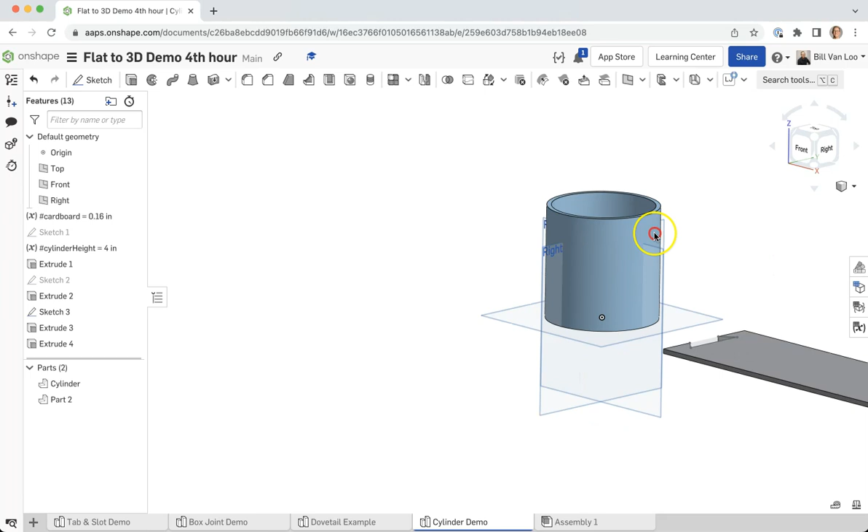All right, so in this video, what I'd like to show you is how we can use our flat modeling techniques in Onshape to actually make a circular shape like this cylinder right here. So this is going to involve a couple of steps. I'm going to zoom back and show you what I'm going to end up with, basically, and then I'm going to talk you through how I got there.

So ultimately what I want is this cylinder, but I want to make it out of a single flat piece of cardboard. So the question is, how do I do that? I could chop this up into a bunch of tiny little rings that all get stacked on top of each other. But instead what I'm going to do is basically take this one cylinder, unroll it to make one flat piece. I'm going to add some joinery so the ends of that piece can get stuck together.

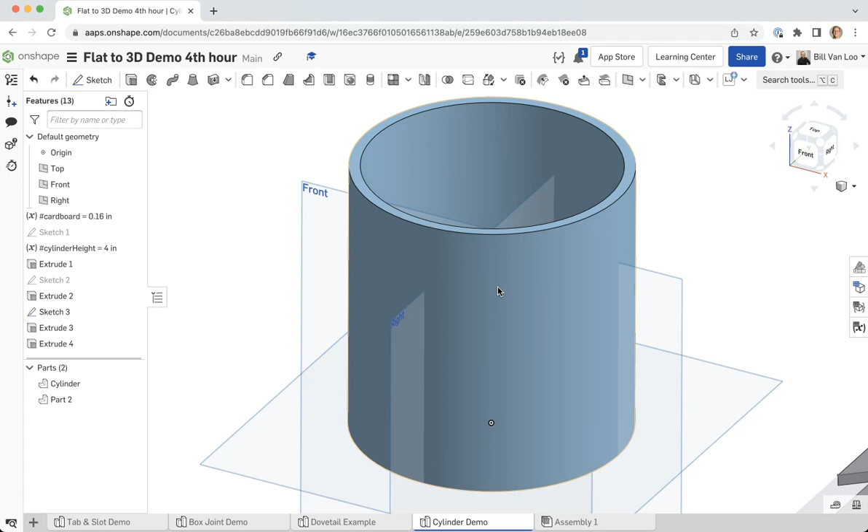And then when we eventually laser cut this, we will have to add a few things to the drawing that is used by the laser cutter so it knows to score the piece so that it becomes flexible and we can wrap this thing around. So let me make a new part studio, and right away what I need to do is start off by sketching my cylinder. And so the way that I do this is going to be important.

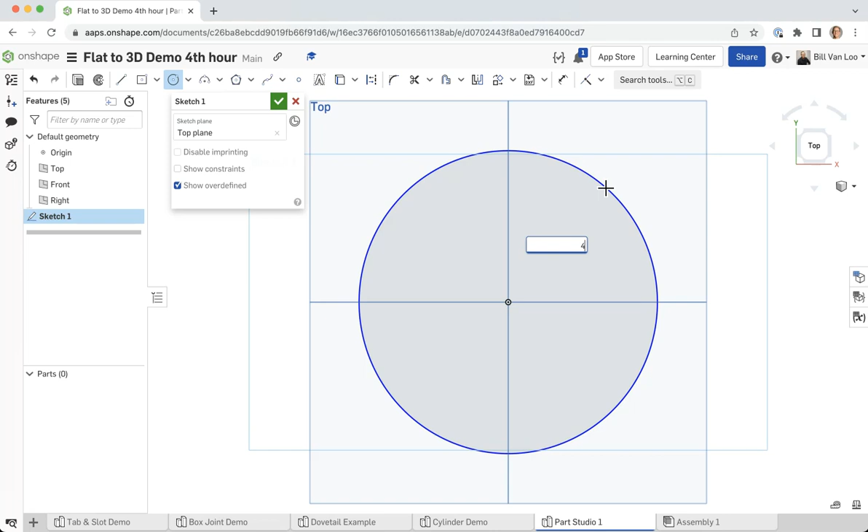I'm going to sketch on my top plane, and I'm going to create a circle. So let's say that I want the cylinder's outside diameter to be 4 inches. Next thing I need to do is make another circle inside that that basically acts as the inner wall of the cylinder. So I'm going to bring this out to whatever arbitrary size. And now what I want to do is add a dimension between those two things. I want to be able to say specifically how far apart these two circles are, because that's going to be the thickness of my piece of cardboard.

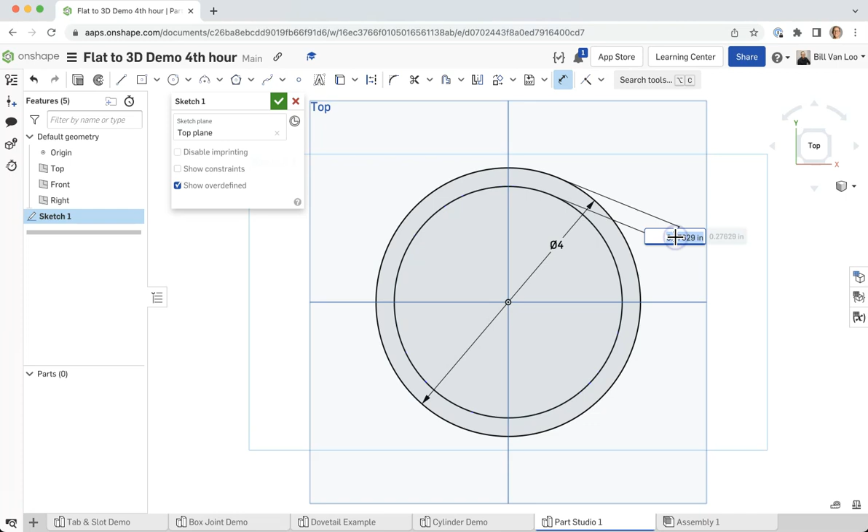So I'm going to make myself a variable. I'm just going to call this cardboard. I'm going to say that it's 0.16 inches. And now we're going to see those two circles adjust. So that all looks good. Next, what I want to do is actually extrude this up to create the cylinder. So I'm going to go ahead and select just that outer ring.

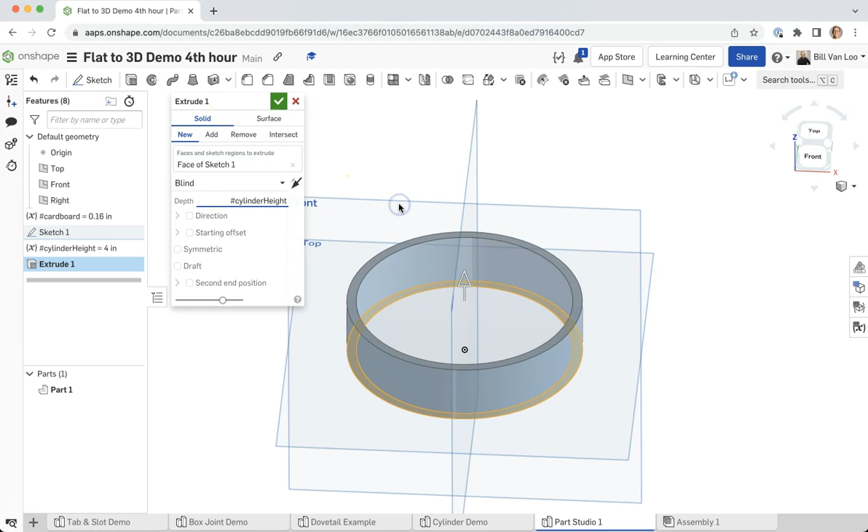And I'm actually going to make myself another variable just so that I don't have to keep track of stuff quite so much. We'll say that this is my cylinder height, and let's say that we want it to be 4 inches tall. So we'll go ahead and click the check. And now I've got a 4-inch tall cylinder. So that all looks great. So I can use that in my model as the cylinder.

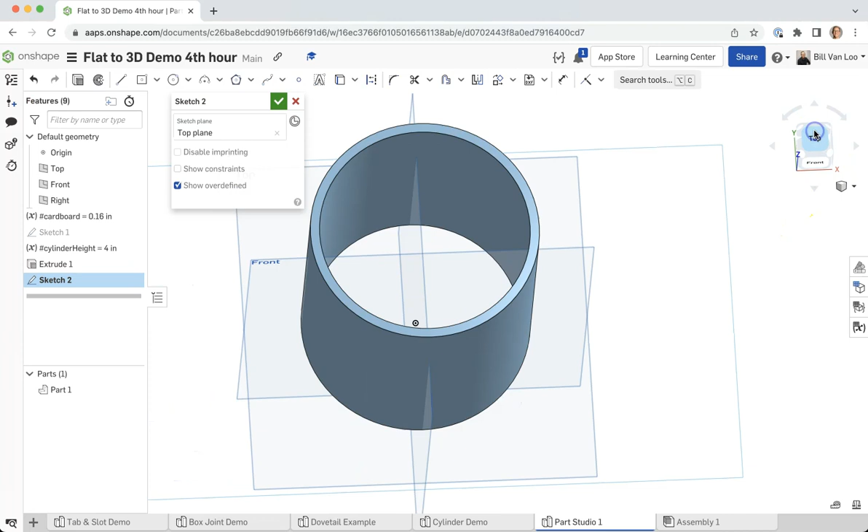But now what I want to do is think about how I'm going to make this on the actual laser cutter out of that single flat piece of cardboard. So I'm going to make myself another sketch. I'll do this just on the top plane as well. And what I want to do is think about unrolling this cylinder into the flat piece. So I know that ultimately it's going to become a rectangle with some features, and I'll add those in a second. Instead of using my center point rectangle, let me use my regular rectangle here. And I'm just going to draw this out, again, at an arbitrary size.

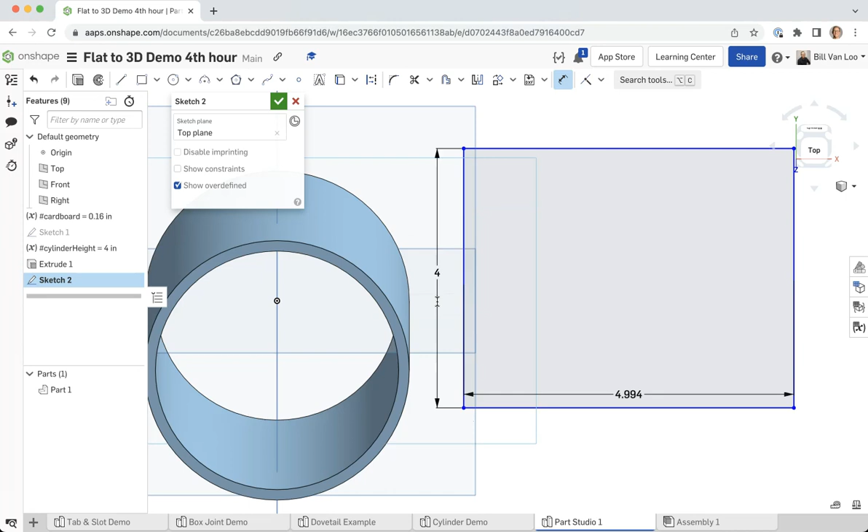So in other words, I'm not trying to get that rectangle exactly perfect right now, but now I do need to put in some dimensions to make it exactly the right size. So the first thing I'm going to do is come over here and say this is going to be the height of my cylinder. So I'll use that variable cylinder height that I made, and it's going to adjust it to 4 inches. So it's 4 inches tall, just like my cylinder, or it will be. But now I want to think about what the length of that is. And so here we have to go back a little bit to our geometry.

So what we defined when we said that this outside circle was 4 inches was the diameter. But what we need to know now is what's the circumference of that circle. And the circumference is just 2 pi r. So what I can actually do in Onshape is say, well, I want this length of this thing once it's unrolled to be 2 times 3.14. We're just going to use that for pi. You can put more significant digits in if you want, 3.14159. I don't remember what the next digit is, something like that.

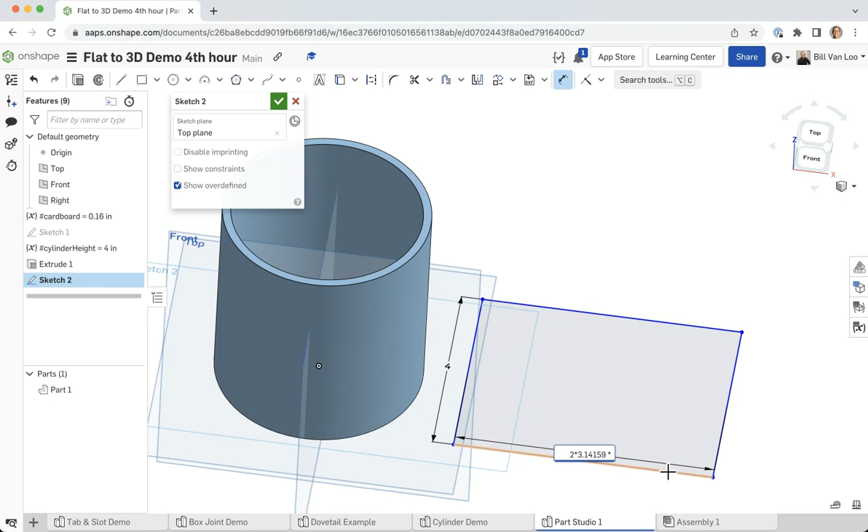And then, so that gives us 2, that gives us pi. What was the radius of our circle? Diameter was 4, what's the radius? Radius is 2. Okay, so Onshape will take that whole thing, and it will spit out the correct calculation for us. So that is the circumference of that circle, unwrapped as though it were a flat shape. That all looks good.

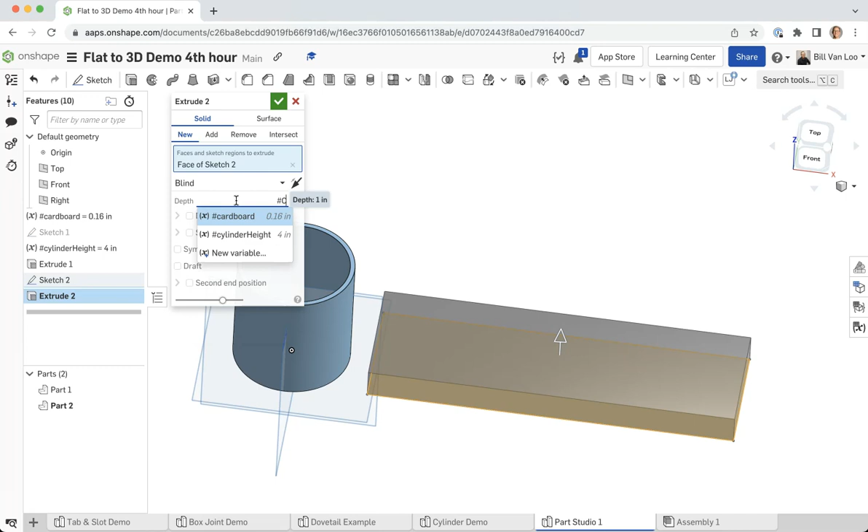And now I could go through and I can extrude this out the depth of my piece of cardboard there as well. So if all I wanted to do was just cut that flat piece and then fold it up, I could probably do this at this point. Again, I would have to take it into the software that we'll use to set up the drawing file to make those score lines so that it becomes flexible.

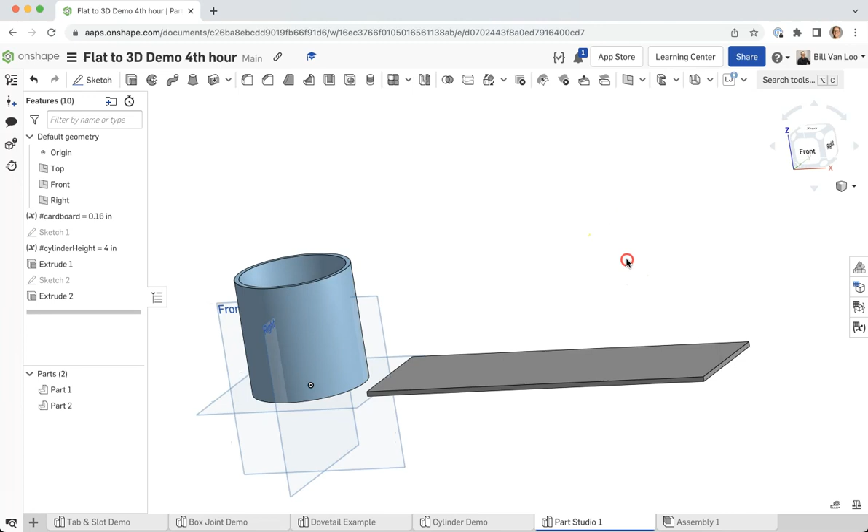But I'd like that thing to be able to be joined together so that it's not just kind of flopping around once we wrap the cylinder around there. So I'm going to add a little bit of joinery to the end of this. And this is maybe useful to show some sketching techniques here as well. So I think what I'd like to do is add one of those dovetail or sort of puzzle joints to the end of this thing.

And here's how I'm going to approach this. I want to make one of those angled lines go off this way, and the flat part of it go out this way. Now I didn't place that very precisely, but that's okay, because here's what I'm going to do. I'm going to make myself a construction line right at the midpoint, and I'm simply going to mirror this angled line over. Oh, whoops, I need to select my mirror line first. I'm going to click on my mirror line, select this, and then it's going to mirror that angled line over there.

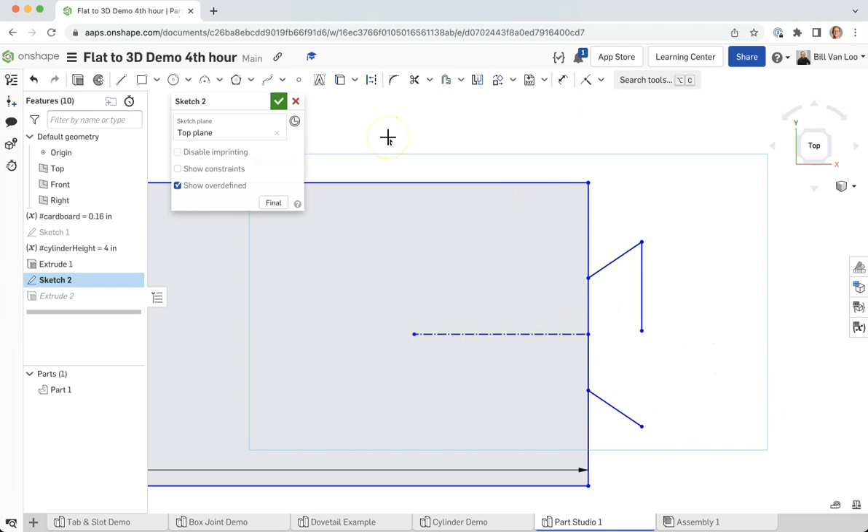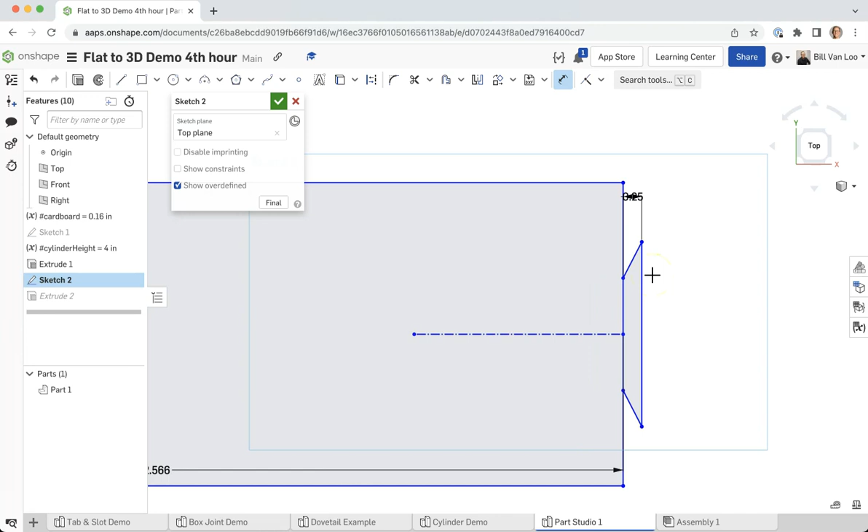So that looks great. I'm going to get rid of this line because it was just a placeholder. And now I'm going to actually complete that shape, so now it turns into a closed face. I also am going to use my dimension tool to set the distance between these points here. I think maybe 0.25 would be good for this. I don't want it to be too big because this is supposed to be circular, and a big flat dovetail is going to make it hard to curve that whole thing around.

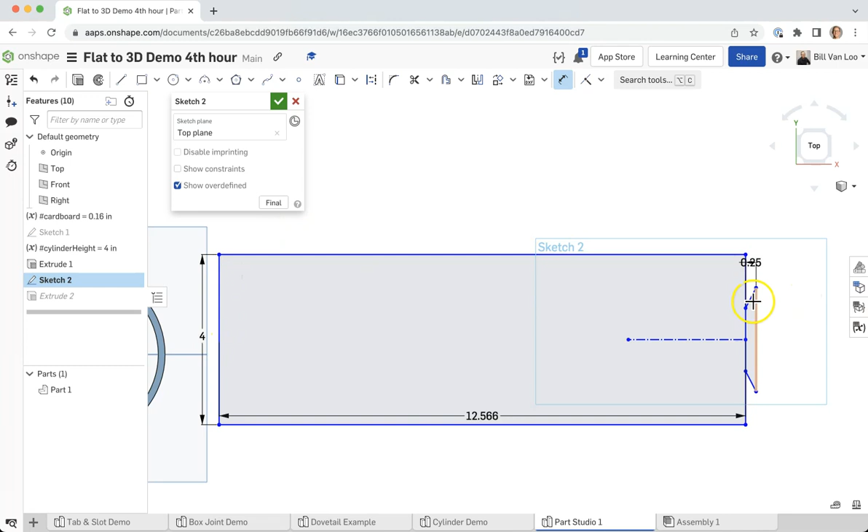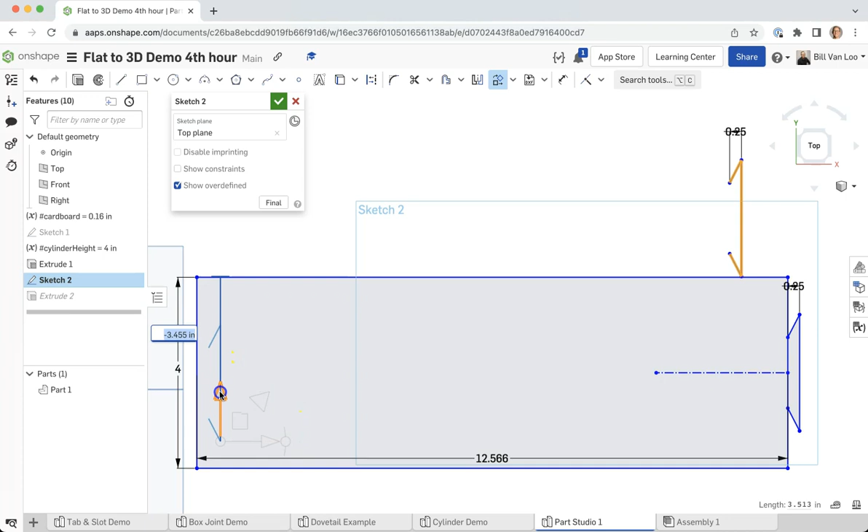So that looks great for the positive end of this, but I'm going to be wrapping around itself, and it's got to lock into the other end. So how do I get that sketch geometry over there? Well, I can select those couple lines, 1, 2, 3. I can copy those. If I right-click, I can say Copy Sketch Entities. And now I can paste those things in there. They're definitely not in the right spot, but I can use my tools to line those things up. I'm going to drag this down some. Basically I'm looking to get this in exactly the same spot on this side compared to where it is on the other side.

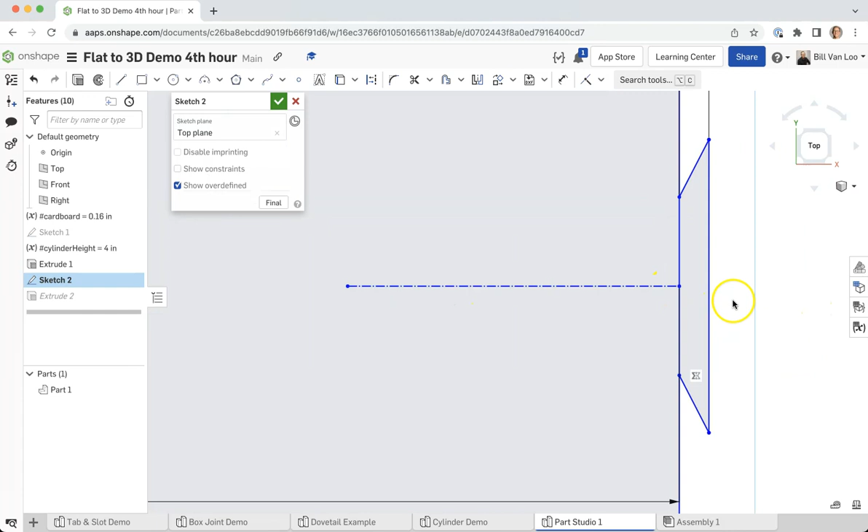So let's see. Might have helped me out if I'd grabbed the other line there as well. I'm kind of eyeballing this right now. Actually, let me redo this because that didn't work very well. I'm going to undo pasting that. Looks like Onshape has taken a second to undo that change. Okay, there we go. So what I'm going to do is make one more line that goes between those things, and then I'm going to copy all 4 of those lines instead of just those 3.

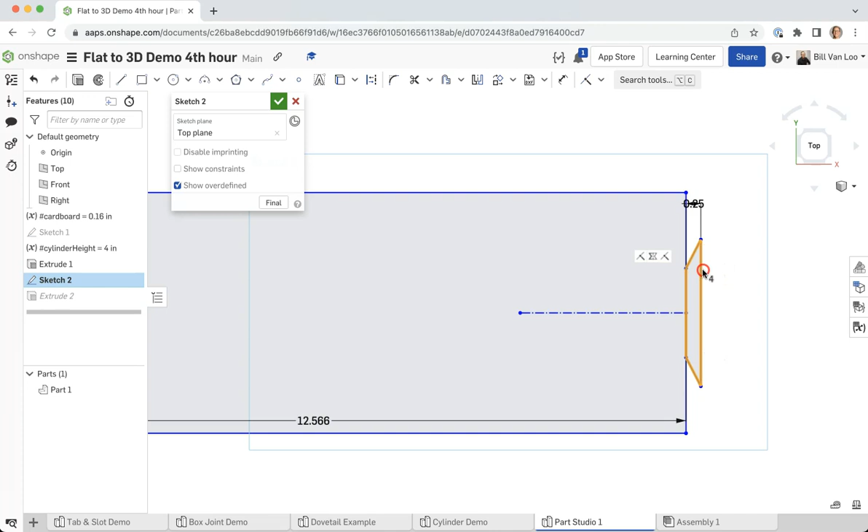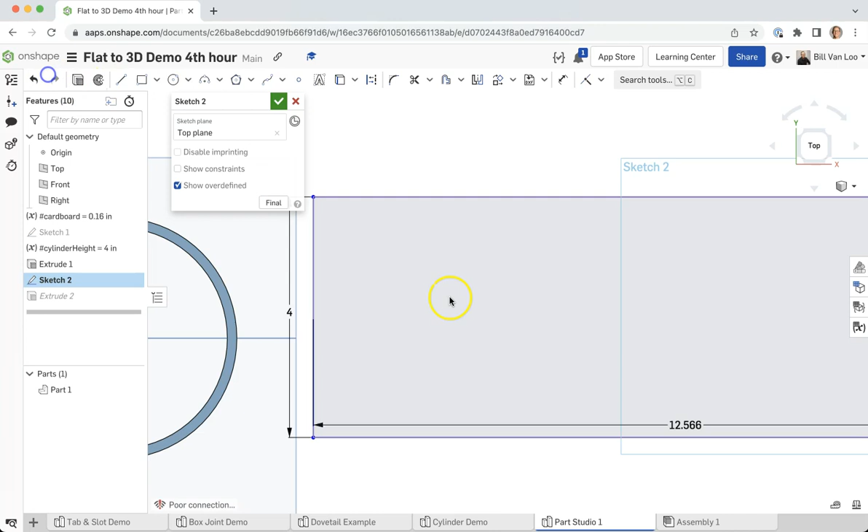So let's copy sketch entities, paste sketch entities, and now when I move this over, what you should see is that line at the end, hopefully, is going to start lighting up and connecting over there. And if it doesn't, that's okay. We can just leave those lines right there. Whoops, come on. Try that one last time. I had to click to set the line. That's what it was. All right, so let's just use a constraint to put those in place.

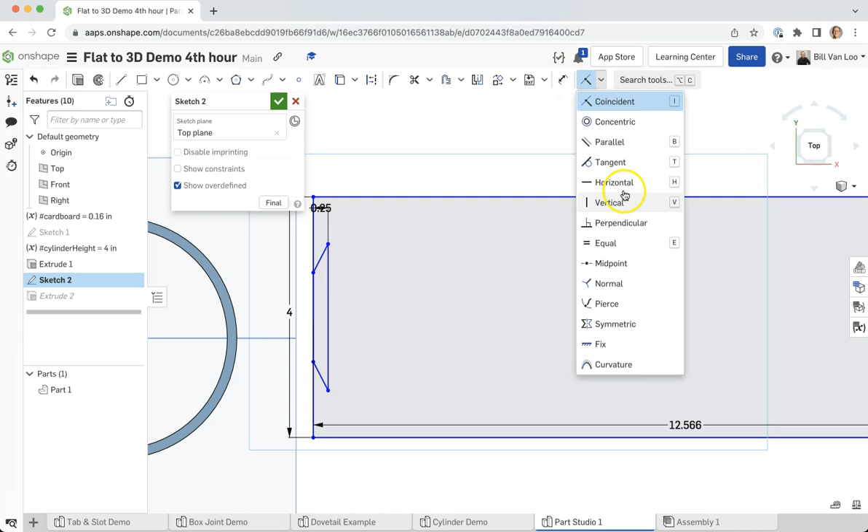So we know that we want this line to be coincident with this line. So that snaps those things together. That's great. And we want the midpoint of that short line and the midpoint of this line here to be the same. And it looks like maybe those already are, so I think we're good there. And now it's already cut that away.

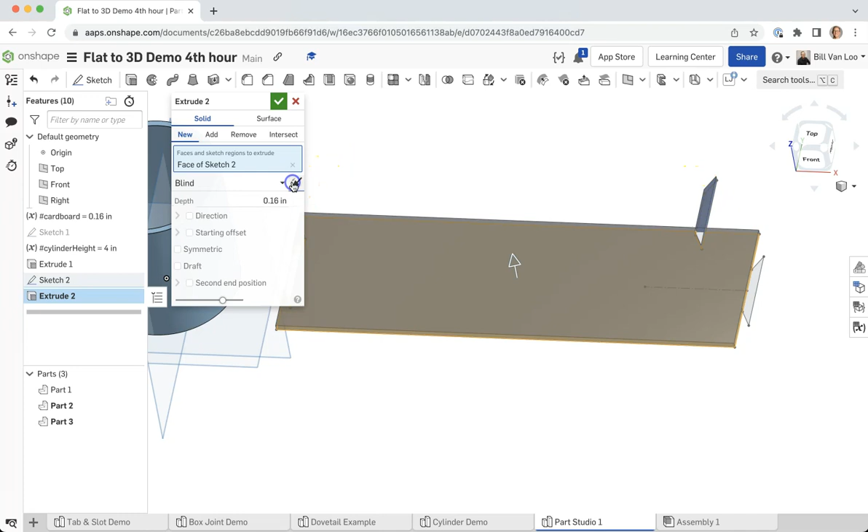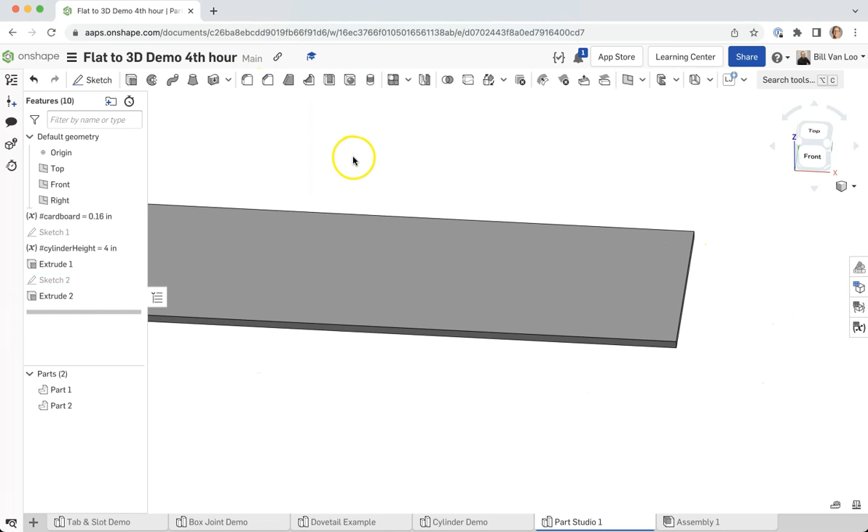Whoops. Sorry, we've got to get rid of that piece up there. I don't know why that was doing that. Okay. So it accidentally took a bite out of that. Let's get rid of that in my sketch. All right, there we go. So it correctly left that dovetail slot there, but it did not extrude this part here for the positive piece. So there we go. Now I've got both halves of that.

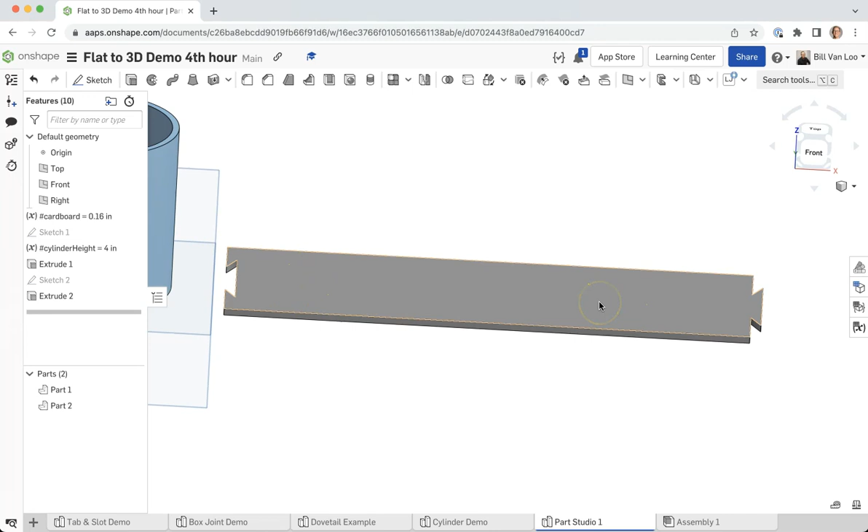So this thing is basically ready to export for the laser cutter. And once we get those score lines in there, we should be able to wrap this thing around and basically just connect it together using those 2 ends.